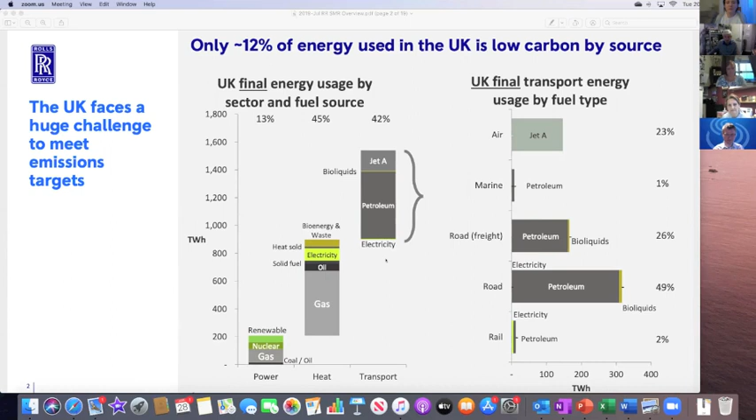Well, you'll notice Jet A at the top there, and in the future with net zero, you may get regional aircraft with hybrid electric or even hydrogen-powered engines, but you won't get transatlantic or long-haul aircraft - you'll still need the full jet engine. Therefore, to go net zero, you have to go to synthetic fuel, and that's going to be massively important to keep the aero industry going during the transition to zero carbon.

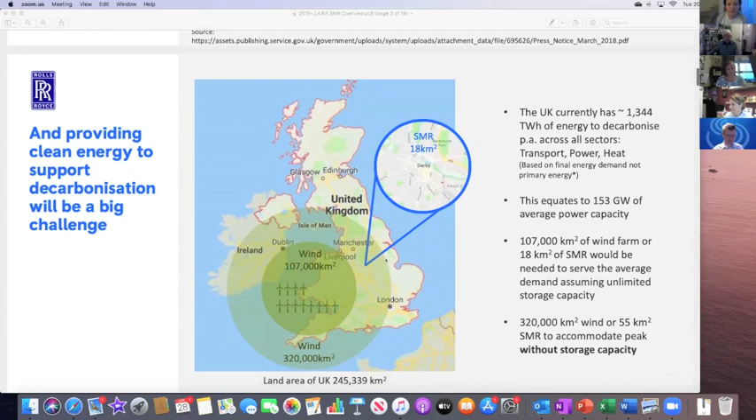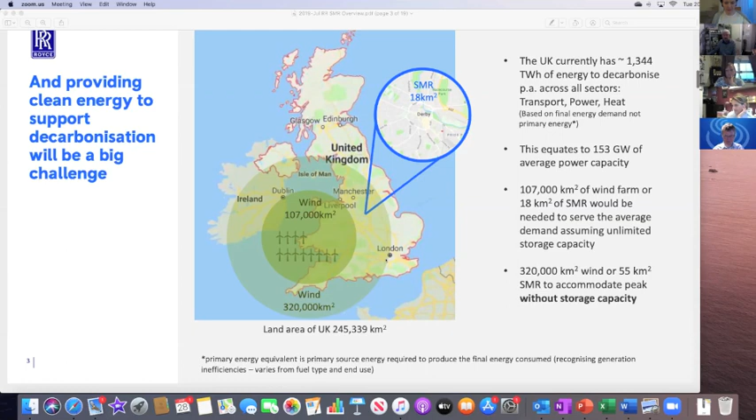It will be a massive challenge. You look at that, and it's the equivalent to decarbonise that market I told you before of 153 gigawatts. We believe in a balanced energy market, but you can see that renewables, if you tried to develop that - and this is where power density comes in - it'd take all of Wales, the Irish Sea, up to a portion of Ireland, most of Devon and Cornwall, and getting towards London to do it with wind farms. If you do the same thing with the power density of nuclear stations with SMRs, for example, it'd be 18 square kilometres.

So the other reason we developed this was that you've all probably seen the issues with large reactor plants on delivery. We'd realised about 6 to 8 years ago that there were only going to be two winners in the large nuclear power market in the world, and that was China and Russia. That was because their drivers are not necessarily commercial, they're majoritively political, and they make no secret of that. But the large reactors have actually got to a size where technically and financially it's becoming difficult to deliver them. They've almost got now to the absolute nadir of what they can produce.

We believe the answer was we needed a commercially investable reactor station. It's small in physical size and power output compared to a large reactor. The footprint is about 1.5 Wembley stadiums if you're a football fan, or it would fit under the O2 footprint if you're a music fan. It's to do with economies of volume over scale.

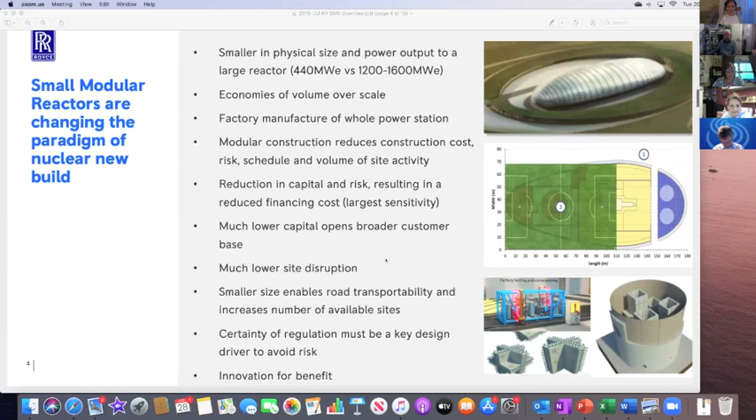But that's the whole point of it. There is innovation we have to do to make that possible, because we don't just want to sell these in the UK. We've got interest from Commonwealth countries, from Central Eastern Europe, from Turkey and the Middle East. So there's already quite a lot of interest in the development. Some of these governments are working with us now to develop it.

Market-driven requirement, I'll skip over that, but that's a detailed analysis of the market globally and what's closed and open to us. Our design's got to be designed for performance, designed for safety, designed for manufacture, designed for reliability and maintenance, and designed for decommissioning. So there's a lot of designs there.

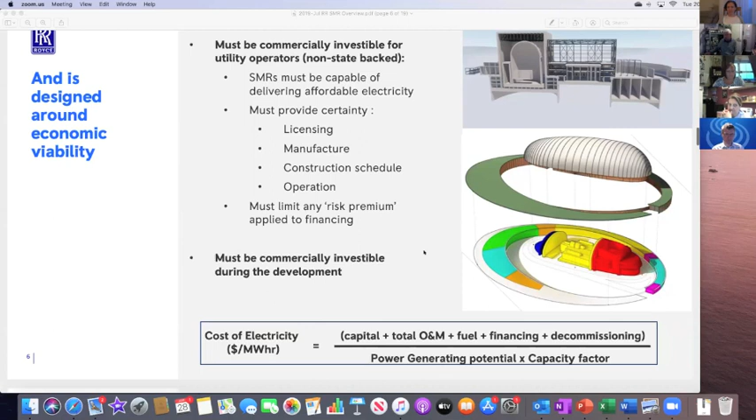I know Gary raised the TRL and MCRLs, technology readiness and manufacturing capability readiness levels. But we also have a process, which we've had in Rolls-Royce for just over a decade now, called integrated product and production readiness. What that does is effectively bring all the skills into the design team from the start, to not just look at the design concepts, but their affordability and deliverability, through starting embryonic business cases on things like, for a power station, the levelized cost of electricity and comparing it with other outcomes, the supply chain and the confidence you have in that, and the entirety of the delivery model. From an embryonic stage, we start that right at the beginning of development programs now.

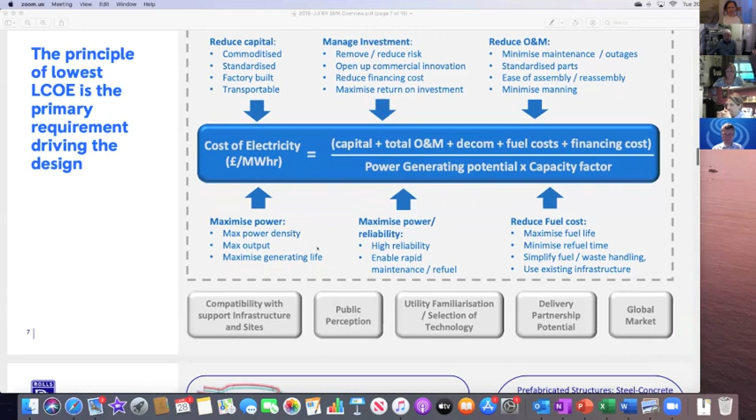So I'll skip over this, but levelized cost of electricity is what drives this one. It could be fuel efficiency, thrust, and aerodynamics for an aero engine. They're all different. Looking at a little bit more detail here, our design has an optimized civil construction layout.

Laing O'Rourke do civil modules now at workshop for hospitals and large infrastructure programs. All we're intending to do is take those off site with rebar put in them in advance as modules, and almost stickle brick build, if you will. It's a massive Lego set, really, more than anything else. The primary plant is a stick plant, but each of those components is transportable.

The power level was driven by the transportation requirements. The reactor pressure vessel is 4.5 metres in diameter, around 300 tonnes in weight, and 8 metres long—actually 14 metres when you put the head and the control rod drive mechanisms on, but you transport those separately. And that drove the power level, because that size allows you to put 121 fuel elements of low enriched uranium in.

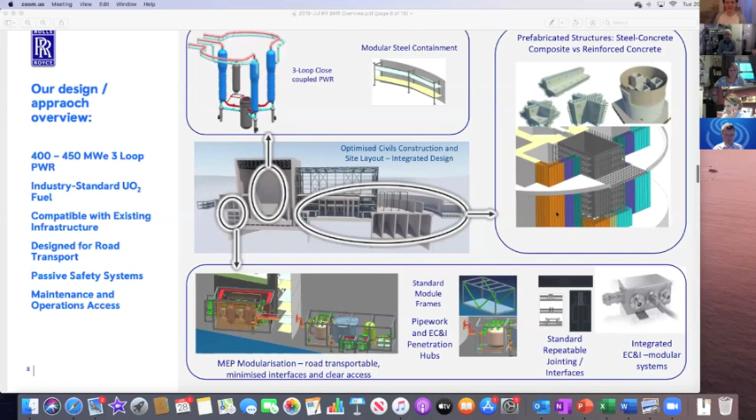That gives you 1276 megawatts thermal power, and via the good old Rankine cycle and some good work by Siemens, who improved that Rankine cycle a little bit for us, you get 440 megawatts electric. If you look at the bottom, we have mechanical and electrical modules as well.

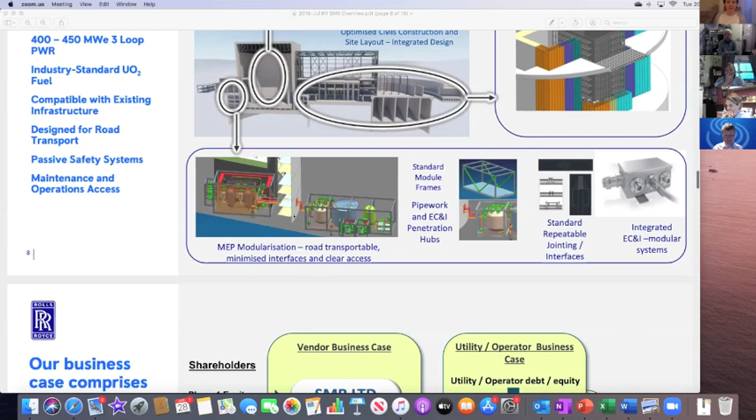Gary's probably well aware that we actually have a full-scale trial of this—shown here is the primary circuit chemical treatment module, and we've got that in Factory 2050, which people can go and have a look at as full scale, because that's the most complex part of the entire system, and it goes through the containment boundaries as well, and it was entirely doable. So that gives us high confidence that we should be able to do the rest in the future.

I'll skip over the business model. What I want to cover here is the sensitivities.

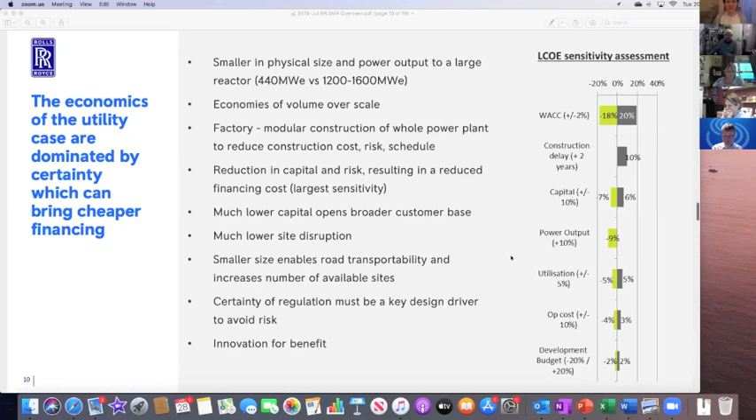When you look at large reactors, you have power output and capital, which are important. Overnight cost of capital is the measure used for power station economics, but it's not a great measure, because by far the highest sensitivity is on the weighted average cost of capital, the interest rate attracted by the risk of the program. So the more you can reduce delivery time and get economies of volume through learner curves in factories, the more improved cost and benefit you get, and the lower the cost banks will lend for investment or the government will pay.

It's designed for all aspects of the life cycle. There are three factories we're going to have: the primary components factory, the modules facility, and the civil modules facility as well. That may be an extension of a workshop, but it's going to be a large facility. Sheffield area is a candidate for the primary components facility, among some others, so innovative ideas are appreciated on those.

For the module factory, our intent is that a lot of this work, and up to 40,000 jobs in the UK, can go into typical industrial northern areas, which is a great benefit from a Lancashire lad as well.

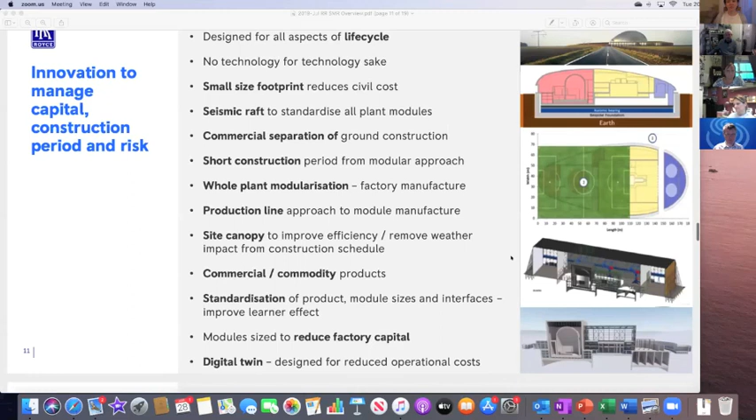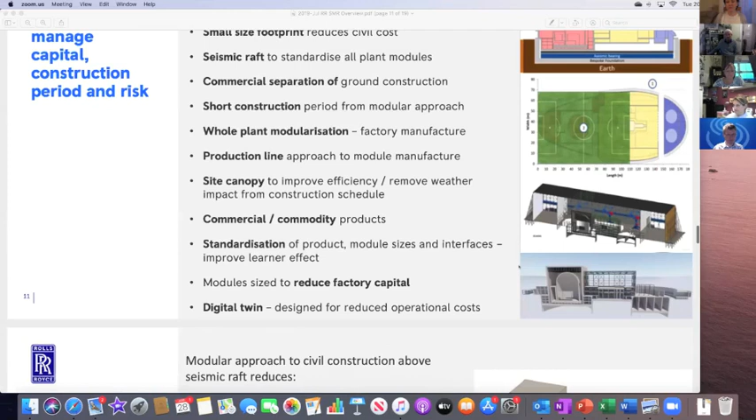The other factory - this is an earlier version, it's been developed since this picture - is a site canopy. Again, because of our small footprint, we can entirely enclose the build, so we disintermediate weather conditions. If you look at somewhere like Wylfa for a large reactor, that could add 18 months to the programme timescale just due to weather in the UK.

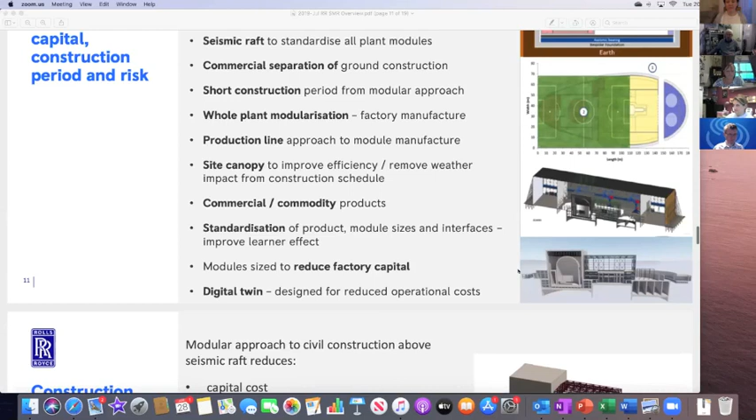The big one we need to do, when I say disintermediating site conditions, is developing an aseismic bearing which removes any seismic activity so that everything above that is standard. So whichever country you're in - Turkey, which has high seismicity, or Indonesia similarly - all require or would like to buy these stations. We have to make sure everything's standard above so we can maintain the learner curve.

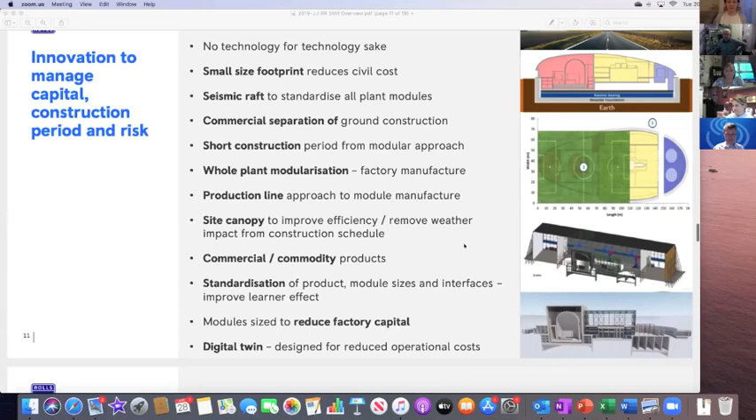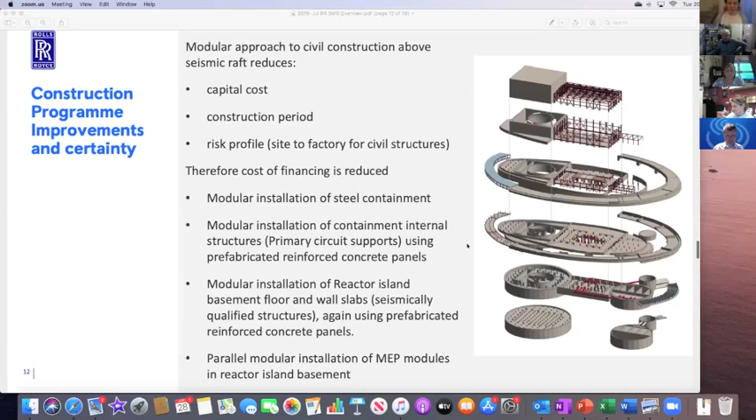We do have a complete modular approach, and this is just a blow-up of the outline civils that's been done as well. We've now got it on an entire Revit drawing, and it's being done digitally.

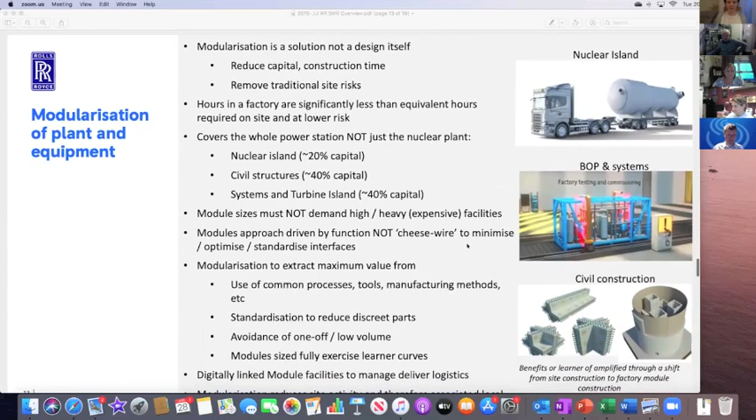Our intent is to have a spine of digital information right from the start, all the way through. Our pass-off facilities are going to have all digital pass-off for size, NDE capacity, all the rest of it, and similarly into the supply chain.

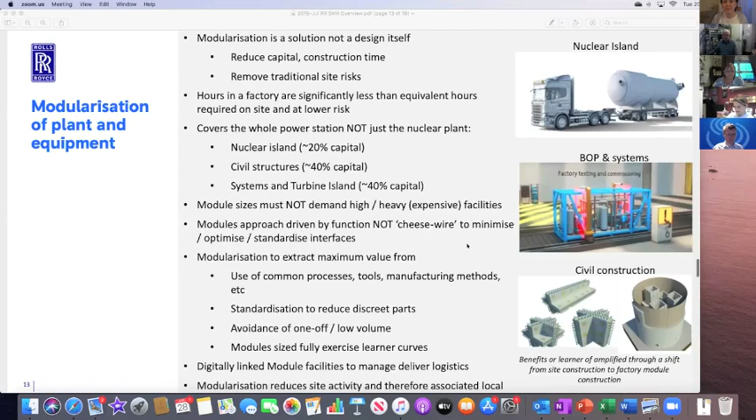My vision is that we'll have one whole digital model, but it's not just a bin for configuration control. I want it to be a dynamic model, because we're going to have all our systems data and equipment performance data built in behind that, accessible through life and by the supply chain. As we go through the process for major suppliers, we're bringing them in as well, and where they've got advice from their knowledge, we're inputting that into the IPPR process I mentioned earlier.

I mentioned the impact of weather, and you can have a look at that in slower time. This looks a bit like Thunderbirds, but it's not - the top one is the kind of process used for NASA space rockets. So this is what we've had a study done on, and we're looking at a similar system.

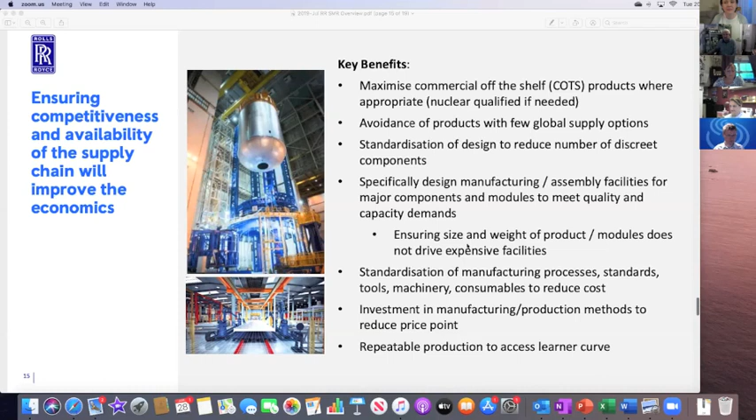Because we are talking volume production, when we do our market assessment, we could be up to four stations per annum when we get up to speed with these, each one being between about 1.5 and 1.8 billion. The bottom one, I do have videos of this, is a mock-up of a modular facility that we've done along with the AMRCs.

I mentioned digital - we've got extensive knowledge of that, not just in aerospace, but in marine. Our intent is to retain the technical authority and give customers a central ops centre for analysis, and do complete reliability centred maintenance - accepting safety-based requirements, but getting away from time-based maintenance altogether - to improve the utilisation of the plant. We'll be able to share the engineering capability across fleets then.

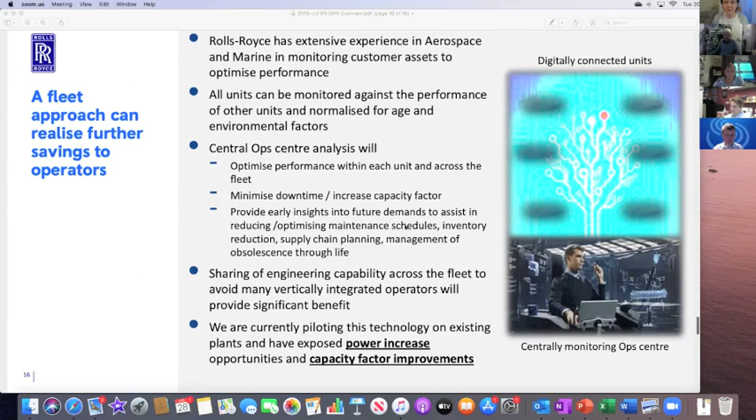Levelised cost of electricity - these are different investment mechanisms which could reduce it, by different parties. And just for this, I'll finish with: our design is all about economics and market requirements. It's got to be commercially investable for utility operators.

The economics, as you saw by the sensitivity analysis, are dominated by certainty and getting cheaper finance. Whatever we do nowadays, we should be doing market-driven requirements alongside our innovative engineering, because if we don't, we are not going to succeed. And let's face it, the UK, although we do good stuff, is not exactly the world leader in manufacturing anymore, unfortunately. So we've got to have an edge with what we do.

It's not just a nuclear reactor. Present company excepted on the call, a lot of reactor technologies have been developed from universities, and they haven't taken a holistic approach to a power station design in the main. And the last one is: modularisation is a solution to reducing costs, not a design in itself.

For me, the proof's in the pudding. In our civil aero business, when I joined the company, over 35 years ago, we produced 36 large engines per annum. We had about 8 carriers as customers then. Up to COVID, and of course COVID's hit civil aero very hard, we had over 140 carriers who used our aero engines, and we produced over 550 large engines last year. Each one, with an integrated supply chain, took 5 days to build. So from over 200 days down to 5 days. And actually, it was only 20 years ago that it was still taking over 100 days for a large engine.

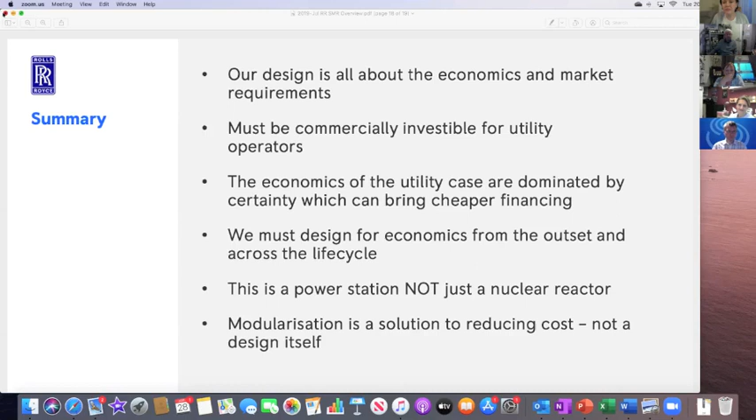I would agree with you that 10% is probably about the right figure for women in engineering, and it's a shame. Something needs to be done. Certainly, I see the government via levy giving incentives to under 16s, under 18s, but maybe if you provide the finance, people will start to look. I think the bigger companies are adhering and bringing in a larger proportion of girls to engineering or apprenticeships or whatever.

But it's the smaller companies that aren't doing it. If I'm being honest with you, it's a difficult one - it's a little bit of legacy: we never did, we're not going to, we're not starting. Maybe it's a stick and carrot - if the incentives were weighted the other way, they might start looking. I don't have the magic answer here, I'm afraid, for women in industry. So it's a tough one. I don't know whether lots of people have got different views. Maybe we're going to throw it open on the floor after, because I see a lot of comments there.